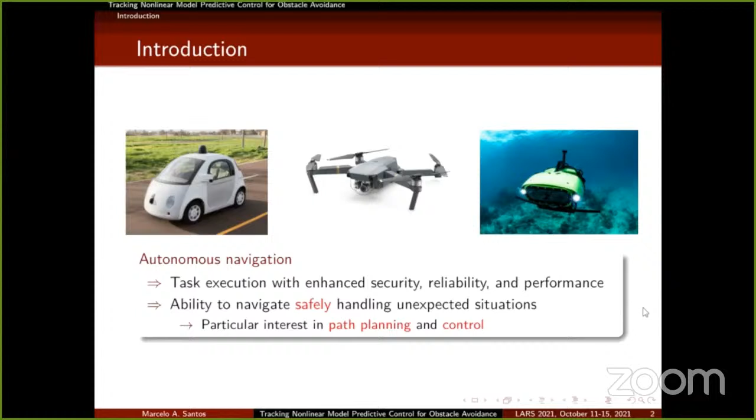In this work, we are particularly interested in the problems of path planning and control, mostly on how they can be performed together. We divide the solutions of path planning and control into two groups. The multi-layer approach is well established and with good results in real commercial applications, however under some conditions it might present performance deterioration and suboptimal responses. The single-layer approach, on the other hand, has an arduous design process due to its complexity. It requires a compromise between planning and control, since it is a multi-objective problem. However, it may have the benefits of avoiding suboptimality.

Optimal control is an interesting idea to work with in the coupled scheme because it allows gathering distinct objectives together and handling constraints explicitly. Particularly, we are interested in model predictive control, a finite horizon optimal controller, because it provides firm guarantees of stability and convergence from the control algorithm standpoint. Besides, its prediction-based nature allows better tracking performance with smoother control signals.

One of the problems that we are mostly interested in this work is the loss of feasibility during navigation. We can see two main sources of feasibility issues: the system dynamics limitations to perform a given task, and the limits and obstructions in the workspace.

In the literature, single-layer optimal controllers for avoidance are designed considering obstacles either as hard constraints or soft constraints. When considering them as hard constraints, feasibility issues could occur due to a large number of unknown pop-up obstacles, since the search space of the optimization problem might become excessively small. On the other hand, considering soft constraints, the idea followed in this work, feasibility problems might occur due to changing targets, common in this type of application, and due to significant deviation required to avoid an obstacle, because this might drive the system outside the controller's domain of attraction.

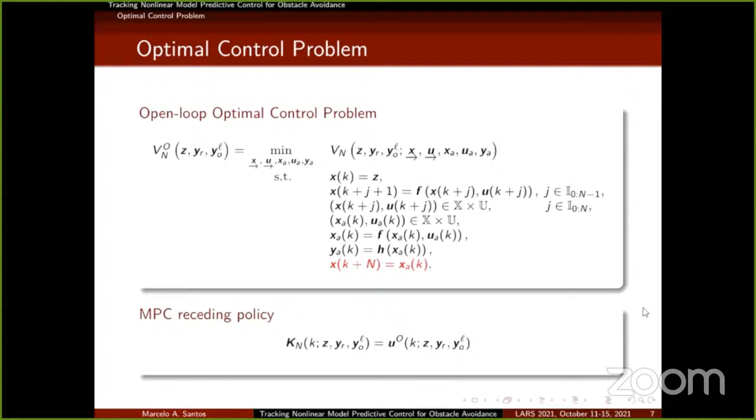The value function for the problem is composed by a stabilizing stage cost, standard in MPC, an offset cost function to make the artificial output converge to the desired output, and an avoidance cost to drive the artificial output away from the obstacle. It is worth noticing that the system is controlled with respect to artificial variables and not the user's desired ones, bringing feasibility assurance to the problem and enlarging the domain of attraction.

Also, note that the number of obstacles is unknown and not limited. However, to simplify the notation, a summation over the number of obstacles is omitted here.

The assumption of the stabilizing cost is that it is a continuous, convex, and positive definite function that is zero at zero. The assumption of the offset cost is that it is a continuous, convex, and positive definite function that is zero at zero. Additionally, and most important, this function is strictly increasing with respect to the distance between the artificial output and the desired output.

Finally, the assumption on the avoidance cost is that it is continuous and not increasing with respect to the distance between the artificial output and the obstacle position for all the obstacles. Also, this function is superiorly bounded, and it goes to zero when the distance is greater than gamma.

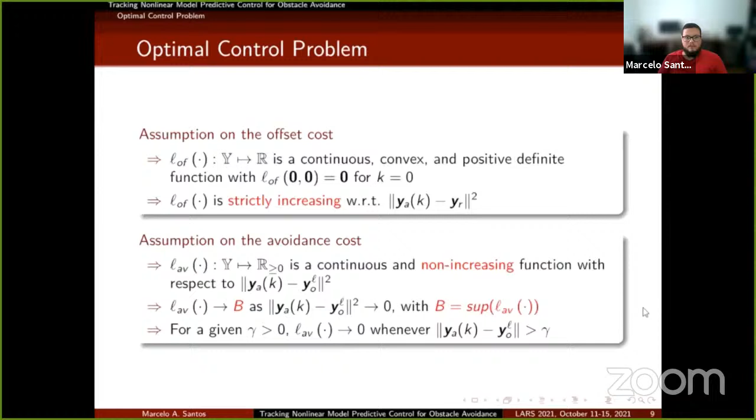These assumptions and the controller formulation allow any function respecting them to be considered. Now let's see some examples of how to set up this controller.

The stabilizing stage cost can be a quadratic cost penalizing the state error and the control effort, as common in MPC controllers. The offset cost function can also be a quadratic cost penalizing the artificial reference and the target. And the avoidance cost function can be some S-shaped functions such as sigmoids or hyperbolic tangent. For instance, here we are using a logistic function.

Some important remarks: the offset and the avoidance cost form an artificial potential field, but the avoidance cost must be bounded. The controlled system may suffer from local minima depending on how the offset and the avoidance costs are selected. If a local minimum appears, the controller will stabilize the system at the closest equilibrium point.

It is worth saying, however, that choices with global properties might be made, for instance, something like the harmonic fields.

The offset and the avoidance costs compete against each other, in a way that collision might occur since the avoidance cost is bounded and the offset cost is not. Thus, it is necessary to work with bounded workspaces, aiming to know the worst case of the offset error to properly choose the avoidance parameters.

Finally, large horizons in slow dynamic systems should be avoided because it might make the artificial reference jump a whole obstacle. If this happens, collision might occur.

So to analyze the proposed controller behavior, let's consider a quadrotor vehicle with 6 degrees of freedom and 4 actuators actuated on lift forces. Thus, the generalized coordinates for the system are composed by the translational and rotational variables. And to model the system using the Euler-Lagrange formulation, three coordinate frames are defined: the inertial one, the body frame, and the center of mass frame.

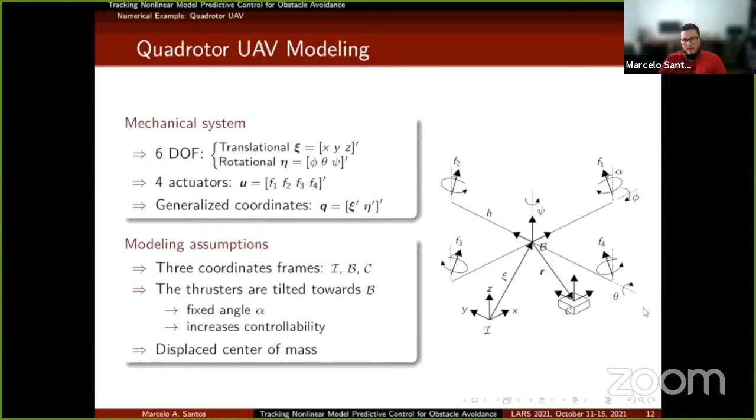Besides, the center of mass is displaced from the center of rotation. Thus, the coupling between translational and rotational dynamics is represented in the model. For control design purposes, the nonlinear model disregards the center of mass displacement. However, the system is simulated with the displacement.

Thus, in the simulation, modeling uncertainties are considered, aiming to be more realistic. The UAV workspace is limited and obstructed by nine obstacles. A 3D LiDAR-like sensor is emulated with a spherical range of detection of 3 meters. The sampling period is 10 milliseconds. The horizon is equal to 50.

Just to give an order of magnitude, Q is around 0.1, R is around 2, the offset gain is around 1,000, and the avoidance gain is around 50,000. The thrusters' lift forces are constrained by 12 newtons, and the states are also constrained. Finally, the simulations are performed using MATLAB and the CasADi toolbox with the IPOPT solver.

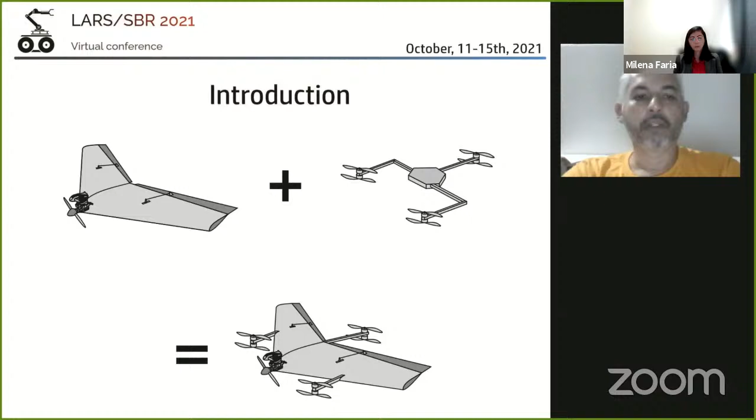For horizontal flight, we chose the flying-wing model, due to its ability to generate lift in almost its entire structure, and additionally to avoid recurrent impingement, which increases the drag coefficient.

The basic flight functions intended with this hybrid UAV concept are as follows. At first, at moment A, the hybrid UAV is landed with the combustion engine at idle speed. At instant B, the hybrid UAV activates the powertrain of the multirotor and takes off vertically. At time C, after reaching the necessary altitude, the hybrid UAV performs a transition to horizontal flight. At that moment, the multirotor powertrains are turned off and the thrust is generated by the combustion powertrain.

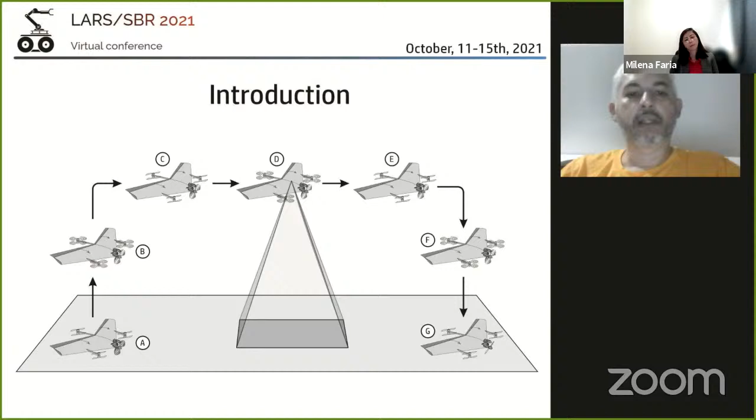During the mission, it is possible for the hybrid UAV to perform slow or hover flying, decelerating the combustion powertrain to idle and activating the multirotor electrical powertrains if necessary. Thus, as we can see at instant D, the hybrid UAV can be used to analyze some specific target. Then the UAV returns to horizontal flight in airplane mode at instant E. The UAV starts the vertical landing procedure at moment F, activating the multirotor powertrain and decelerating the combustion engine to idle speed, and the mission ends at moment G, when the hybrid UAV lands again on the ground.

The multi-rotor system uses coaxial motors with counter-rotating propellers. They enable up, down, clockwise and counterclockwise movements, forwards and backwards movements, as well as right and left movements.

One of the important points in this work was to coincide the center of gravity of the flying wing with the multirotor, reducing the need for corrections by the control board during multirotor flight.

The multirotor has a radius of 0.51 meters from the center of gravity. The flywing has a wingspan of 1.5 meters.

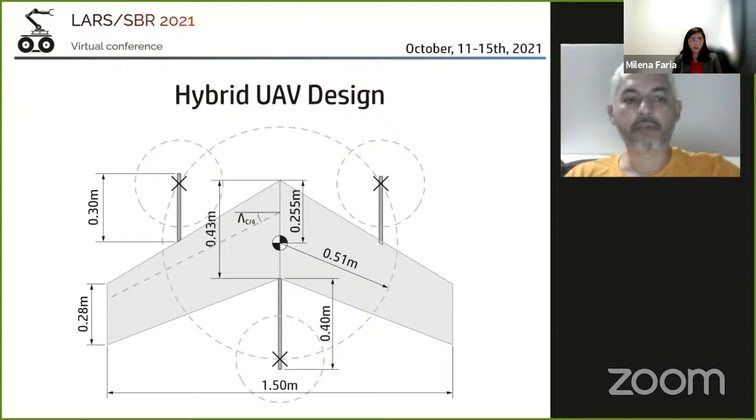With an area of 0.53 square meters, the positive deflection flywing concept requires higher speed than a conventional aircraft for the control surface to act efficiently, ensure control and good maneuverability.

To meet this requirement, three semi-symmetric profiles are analyzed: the ZAG-12, the MH-145, and CPQ-1.7. The choice and use of one of these profiles in the construction of the flywings is due to low moment coefficient values, since the aircraft will not have an empennage.

We analyzed the three profiles using the Profili 2.2a software, comparatively as a function of the angle of attack for the characteristic curves of lift coefficient and drag coefficient.

Considering that UAVs are not aerobatic aircraft, the flight must be performed with the longitudinal wings aligned with the horizon. We considered values between 5 degrees negative and 5 degrees positive for the analysis.

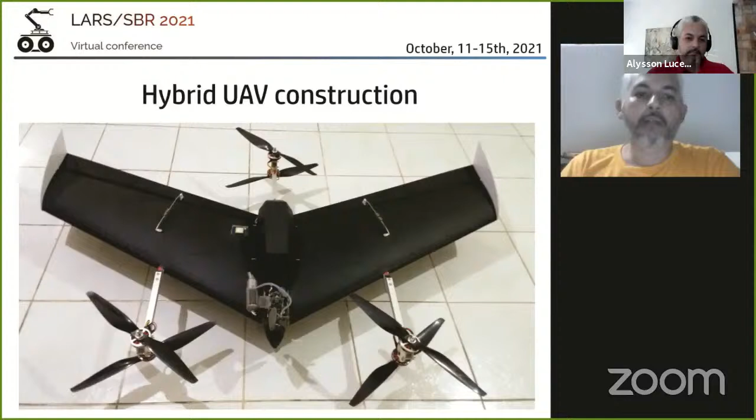We carried out outdoor tests using only the multi-rotor, with the combustion engine turned off. The second series of tests has been carried out only with the flying wing configuration, with the multi-rotor mode turned off.

Stabilization mode via the control board was always activated. The controls responded perfectly. Only basic maneuvers were performed.

We made the final test with head-on wind, including vertical takeoff and transition to horizontal flight. The combustion engine remains at idle until the aircraft reaches approximately 4 meters in altitude.

We started the acceleration of the combustion engine and deceleration of the electric motors. The hybrid UAV performed this transition perfectly, initiating horizontal flight supported by wing lift.

We introduced a new architectural design of the hybrid UAV with a simple configuration. Experiments and results show the versatility of the UAV operating in the field.

We performed several tests, including takeoff, horizontal flight, and transition tests successfully. Our final UAV has proven to be functional and the hybrid system effective.

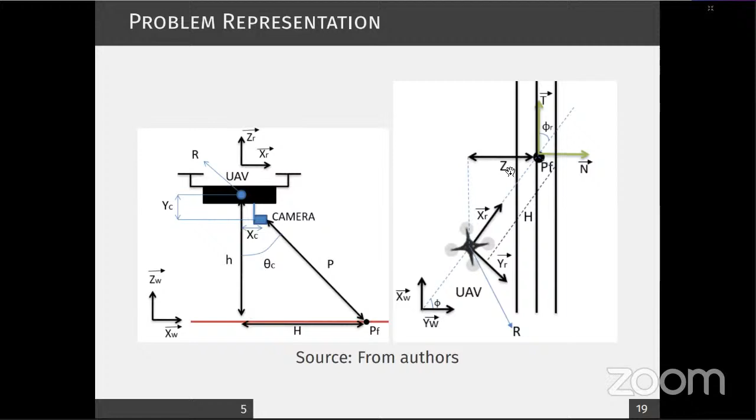Here is the aerial view of our problem, where we have, in this case, 3 power lines. The UAV has a lateral error relative to point PF, which is the variable z, and phi, which is the angular error between the vector xr and the vector t, tangent to the trajectory. These two variables must be minimized.

We apply a transformation of velocities from the world frame, which has 3 variables, to the robot frame, which has 4 velocities, using this matrix to transform between frames.

Next we apply a Serret-Frenet system, which is equation number 2, and then we can evaluate these two equations, Z and S.

Next we define the state errors of our system. These are the two variables stated above, Z and phi. Z is the lateral error, and phi is the angular error.

UOPT is the control action sent to the UAV, where r is UOPT multiplied by cosine of theta. We then apply R to the UAV to minimize the state errors.

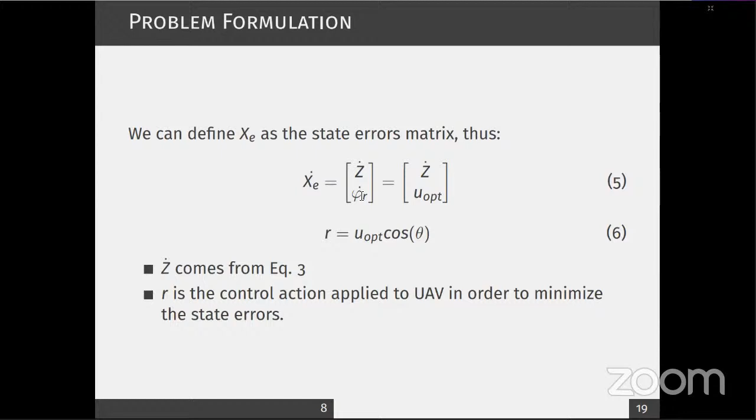Next, the methodology of our paper. First we have a raw image from a camera, then apply a grayscale transformation and Gaussian blur to reduce noise. Then we apply a Sobel operator to minimize horizontal lines and enhance the vertical lines that must be detected, and a Canny edge detector to enhance the straight lines.

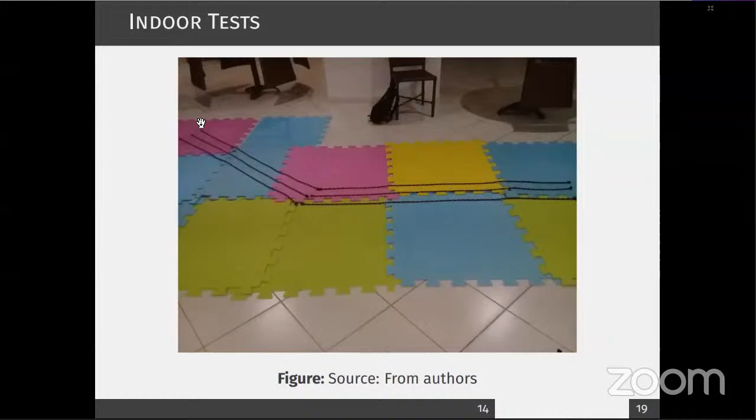For this indoor test, 4 setups were performed, each tested 25 times. For setup number 1 and 3, the UAV starts above the strings with a forward velocity of 0.1 meters per second. For setup number 2 and 4, the UAV starts 20 centimeters from the central string with the same velocities, 0.1 and 0.2 meters per second.

We applied some elementary constraints for the states: 15 centimeters for Z and 0.3 radians for phi r, and the UOPT was constrained as well, at 0.35.

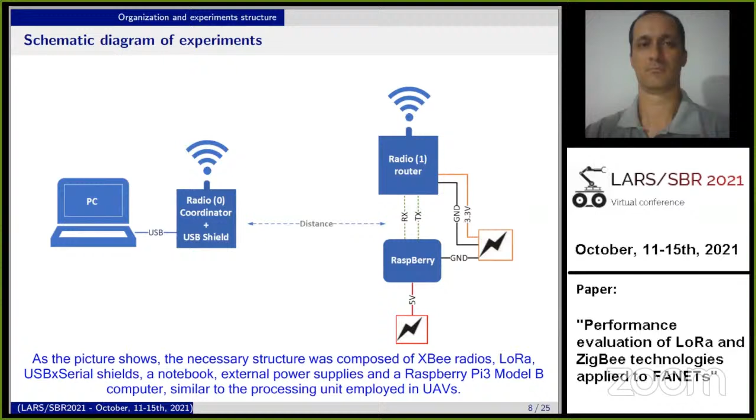As the picture shows, the necessary structure was composed of XBee radios, LoRa and USB serial shields, a notebook, external power supplies, and a Raspberry Pi 3 Model B computer, similar to the processing unit employed in the UAV. The tests were performed at baud rates of 9,600 bps, 38,400 bps, and 57,600 bps.

The investigation took place at different transmission rates and power and spreading factors, defined during the sending of 50 packets of 232 bytes each. Each scenario of sending 50 packets was repeated 5 times with an interval of 8 seconds between each new sending. At the end, the standard deviation and the average in the scenarios were calculated.

It's noted that the XBee radio in hardware in the loop was more efficient at both powers, achieving a transfer rate approximately 4 times higher than LoRa.

In the hardware in the loop experiment, the XBee showed no transfer rate beyond 200 meters at power level 0, but at power level 3, the transfer rate up to 300 meters only decreases significantly compared to the previous distance.

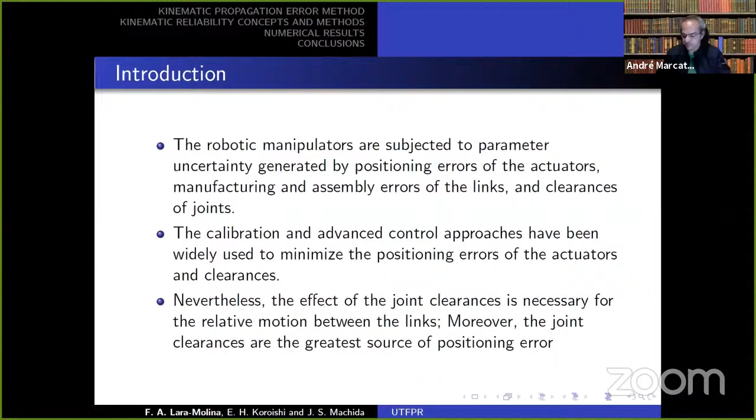Robotic manipulators are subject to uncertainty. The main source of uncertainty is the clearances of the joints. These clearances are necessary for the relative motion between the links, and calibration and control strategies have been used to minimize the effect of these errors. Therefore, it is necessary to develop methods that quantify the effect of these errors.

The present contribution presents a comparative study of several methods to assess the kinematic reliability of manipulators by using probabilistic theory and the fuzzy approach. Our methodology: first, we present a method to compute the total error in the end effector produced by the joint clearances.

Then the uncertain parameters of the clearances are modeled as random variables and also as fuzzy variables. Then four methods are used to evaluate the reliability. First, we have three methods based on the probabilistic approach: Monte Carlo simulation, the first order reliability method (FORM), the second order reliability method (SORM), and the fuzzy method.

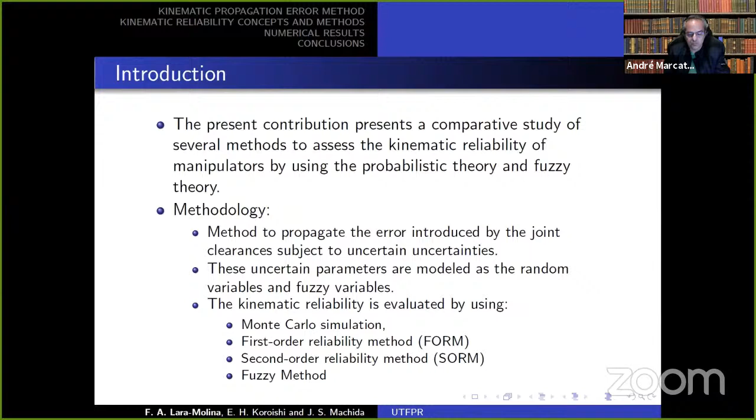The methods will be evaluated in this manipulator, which is a 3 degrees of freedom manipulator with 3 revolute joints. The DH parameters are present in this table, and in this figure is the model of the joint.

clearances. Each clearance introduces 2 additional degrees of freedom, one displacement in the x-axis and another in the y-axis, and the 3 joint clearances introduce 6 different degrees of freedom in the manipulator, set in this vector, the vector lambda.

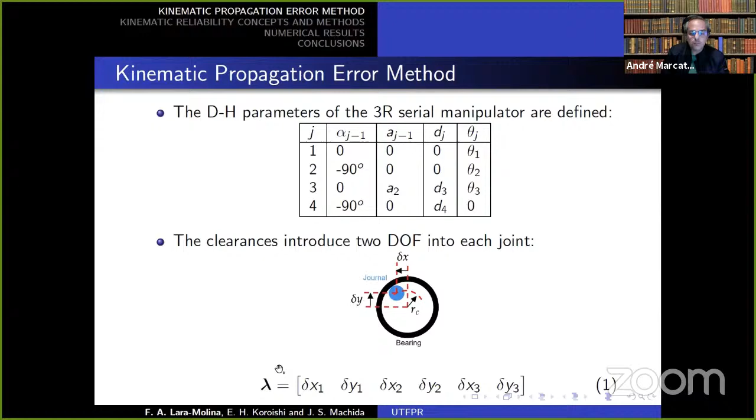First, the method to propagate the error of the clearances. I'm mapping the joint clearances into the total error of the end effector, as presented in this expression. This expression is based on the M matrix, which is based on the homogeneous transformation matrix that takes into account the homogeneous transformation between the frames of the manipulator, and the N matrix, which is a total orientation matrix, and delta E is the screw representation of the joint clearances.

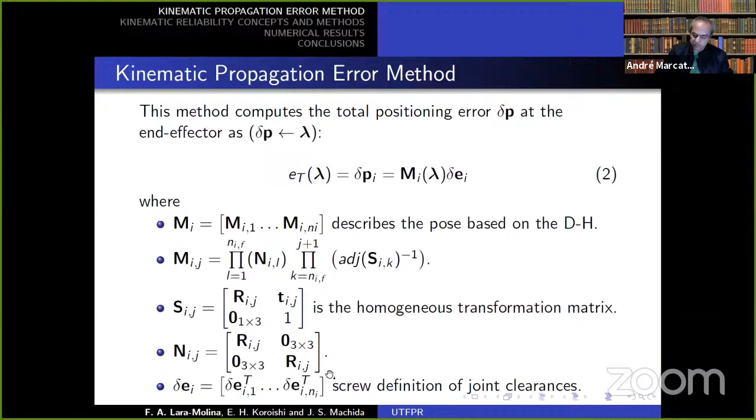The kinematic reliability expresses a measure of the position error exceeding the maximum error limit, as presented in equation 3. The operator Xi represents a measure of probability or a measure of possibility.

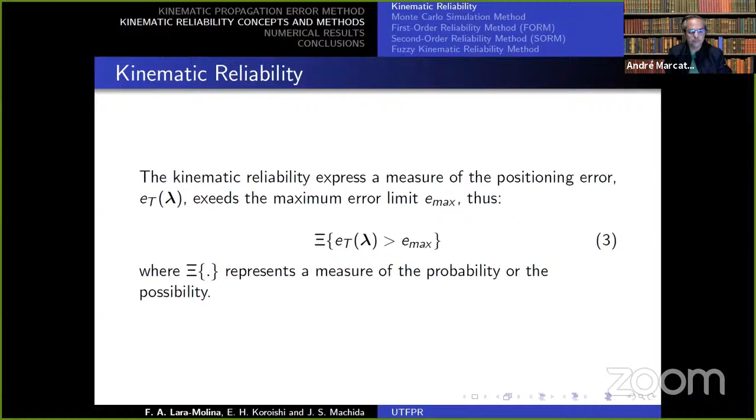The first method is the Monte Carlo simulation. This method has 3 stages. In the first stage, the uncertain parameters are sampled. Then the kinematic error is computed for each random input. Finally, the probability of failure is estimated as the rate of the failure samples and the total number of samples. In this way the probability of failure is estimated.

Then the last probability method is the second order reliability method. In this method the limit state function is considered as a nonlinear model. Therefore, the first nonlinear term of the Taylor series of the limit state function is considered, and the probability of failure is estimated by using the expression of equation 6.

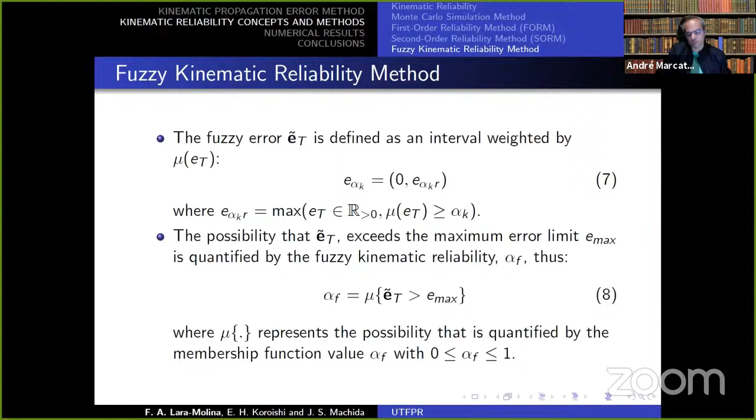Finally, the fuzzy method: the error is expressed as intervals weighted by the membership function, as equation 7 presents. Therefore, alpha f, which is the measure of the possibility of failure, is estimated by using the mu operator that represents the possibility of failure. This estimation demands the evaluation of the membership function, which is a value contained between 0 and 1.

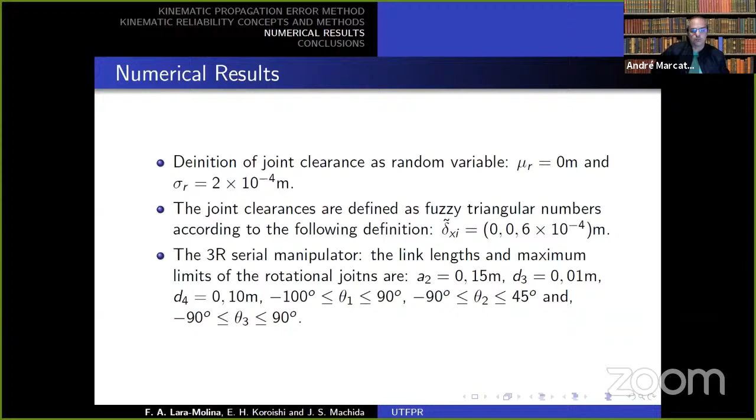In the numerical results, first we have the parameters that define the random variables, the uncertain parameters of the joints. Then the fuzzy variables that define the fuzzy parameters of the joint clearances, and also the geometrical parameters of the manipulator with the length limits and the maximum limits for each of the 3 joints.

Then we evaluate the workspace of the manipulator in the XZ plane and in the XY plane, and we are going to evaluate the kinematic reliability for 11 different positions as presented in these figures.

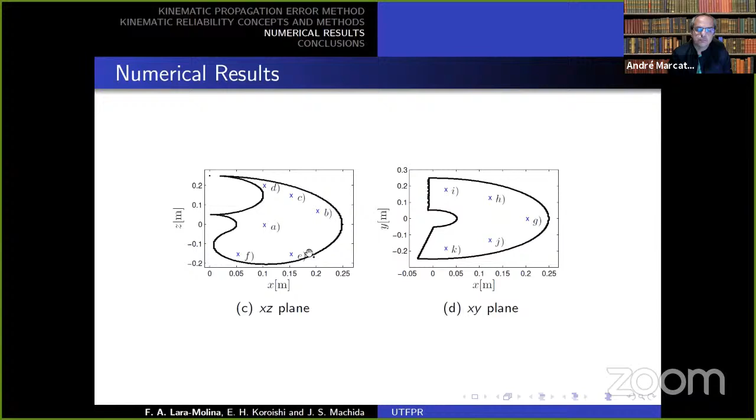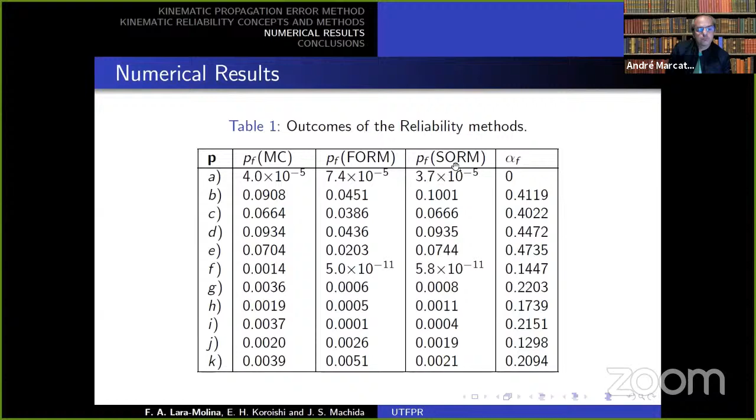In this table, we can observe the outputs obtained of the probability of failure by using Monte Carlo simulation, FORM, and SORM methods. We observe an agreement between these three methods. Nevertheless, in some positions there are some differences, and we can observe that the SORM method corrects the differences between FORM and the Monte Carlo simulation. The Monte Carlo simulation is our baseline to evaluate the probability of failure, and we observe good results for both methods.

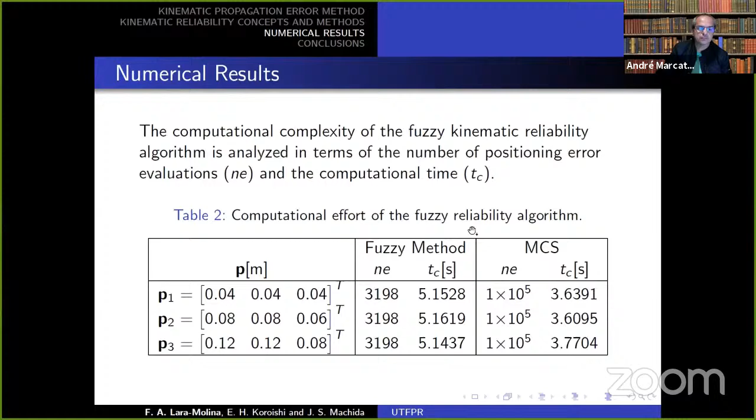Then we evaluate the computational complexity, and we observe an agreement between the two methods in the computational cost. As a conclusion, we observe that the methods using the probabilistic and fuzzy approaches have good results. The kinematic reliability is a criterion used to evaluate the kinematic performance of the manipulator, and as future work we will use these methods for the optimal design of the manipulator. Finally, acknowledgements to the sponsors, CNPq and CAPES, and thank you for your attention.

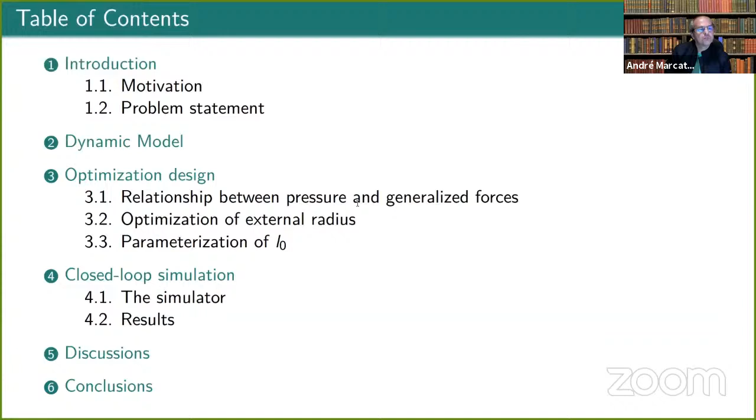This is the table of contents of the presentation, and now let me give you some motivation for our work. Rigid robotics continue to amaze us at record speed due to their incredible precision in tasks like positioning and grasping. However, their limits have also been exposed in applications where compliance and dexterity are needed. Also, due to their high stiffness and inertia, their designs are generally bulky and have high energy consumption.

In contrast, soft-body robots have erupted and changed conventional robotic research by mimicking nature, considering deformable, lightweight, and hyperelastic materials. However, many basic issues remain unresolved, arising from their principal property, which is continuum deformation, ranging from kinematics and dynamics to planning, control, and optimization. In this last area, due to the lack of complete models that clarify the intertwined components of soft robots, many optimization problems have been addressed through empirical methods, as it is difficult to correctly identify the optimization variable.

From here, we notice that the general problem is to obtain a design based on a model to fulfill a requirement. In this project, we address the internal pressure chamber design problem, which relates directly to the model-based design of the topology in actuator space. We also deal with a common problem in robotics, which is the design criteria for energy transfer. Therefore, our problem was how to design a soft robot to perform a task with less energy, given a desired configuration and a desired pressure vector.

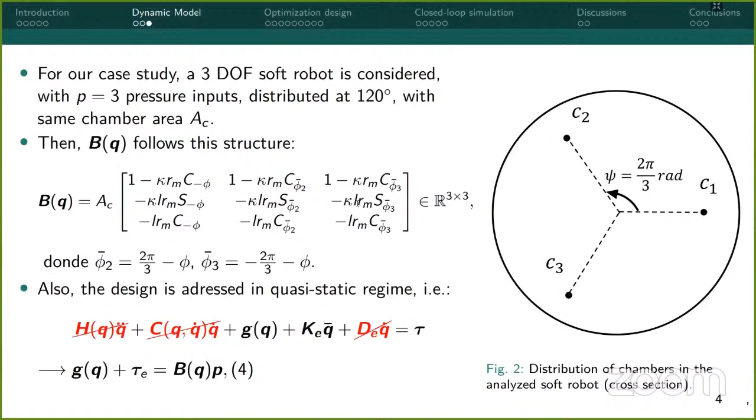Also, it's precise to point out that this design is held in quasi-static regime, so that the model reduces to the one seen in equation 4.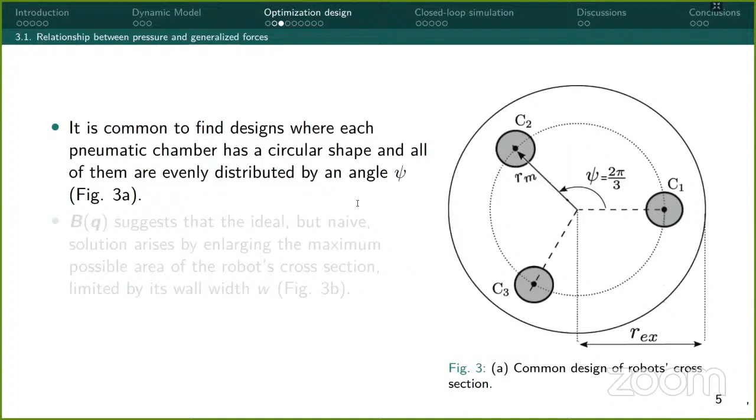However, this design is not the best one, because the input matrix suggests that the ideal but naive solution arises by enlarging the maximal possible area of the robot's cross-section, only restricted by the wall of the elastomer, as seen in Figure 3b. Here, both the area of the chamber and the radius that crosses the chamber centroid depend on the external radius, which makes the input matrix also dependent on the external radius.

As our design objective was to maximize pressure transference to generalized force, the input matrix is an excellent candidate for the optimization problem. We propose the square norm of tau as our preliminary cost function, which for a soft robot takes the form of the expression in equation 5.

From here, we notice that given a desired generalized force, the norm of the vector of pressure is minimized when B transpose times B is maximized.

But as this expression is not in closed form, we need to represent it by a scalar, which in our case was its maximum singular value, also called the spectral norm of B. So our preliminary expression is upper bounded as in equation 6.

If we plot the singular values of B as in Figure 4, we can see that the spectral norm corresponds to two singular values depending on the deformation coordinates. So, by taking the non-trivial root of the subtraction of singular value 1 and 3, we get our bound, which we call L tilde, seen in equation 7.

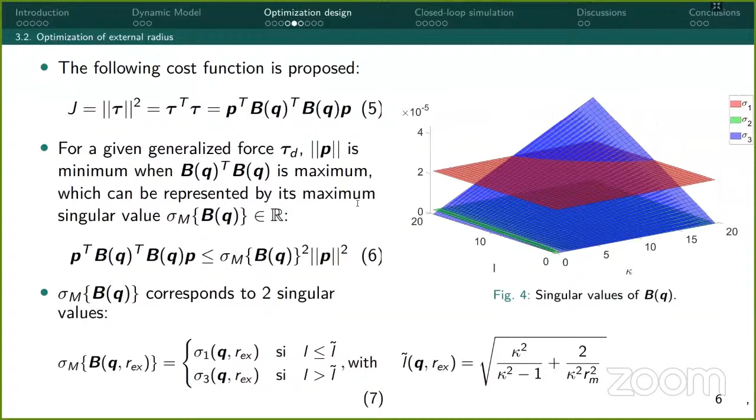We can now define our optimization problem as maximizing the spectral norm of the input matrix by maximizing the external radius, subject to the model in quasi-static regime and an upper restriction delimited by a maximum radius of the robot.

This problem was solved by the extended Lagrangian method, where we subtract from our cost function our active constraint multiplied by a Lagrange multiplier, as seen in equation 11. From here, we got our optimal external radius, which satisfies the Karush-Kuhn-Tucker conditions stated in equation 12.

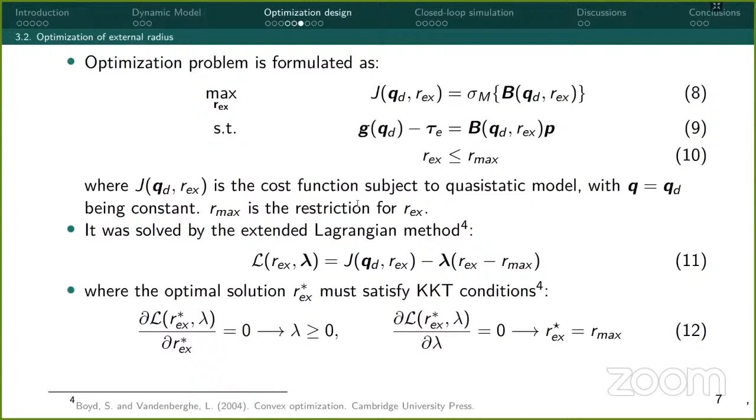Another geometric variable corresponding to the initial volume of the robot is the initial length, which, since it wasn't included in the input matrix, we needed to add into the model some other way. Here, our parameterization objective is to obtain an initial length such that for a desired configuration of the soft robot, we require at most a desired vector of pressure.

So for that, we modify the elastic forces of the model by approximating it with the elastic potential energy proposed by Godage, where it is represented by the sum of an energy of extension and an energy of bending. Also, by using the second Castigliano theorem and Hooke's law, our elastic potential energy corresponds to the one stated in equation 13, where A is the chamber area, I sub A is the area moment, and E is the Young modulus.

By obtaining the partial derivative of this elastic potential energy with respect to the deformation coordinate, we obtain an expression for the elastic forces as seen in equation 14. Then, we equate this expression to the one obtained in the quasi-static model, as seen in equation 15.

Notice that the first and third equations have our design variable, and as the gravity vector also depends on the initial length, we'll have a quartic equation giving us 4 theoretical solutions for the initial length, but only those with a positive lower bound of the desired length are physically viable.

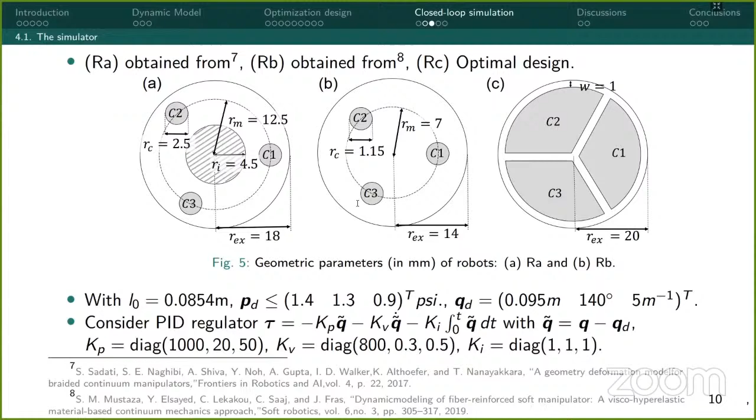All 3 closed-loop simulations were under PID control, having the following diagonal matrices for their constants.

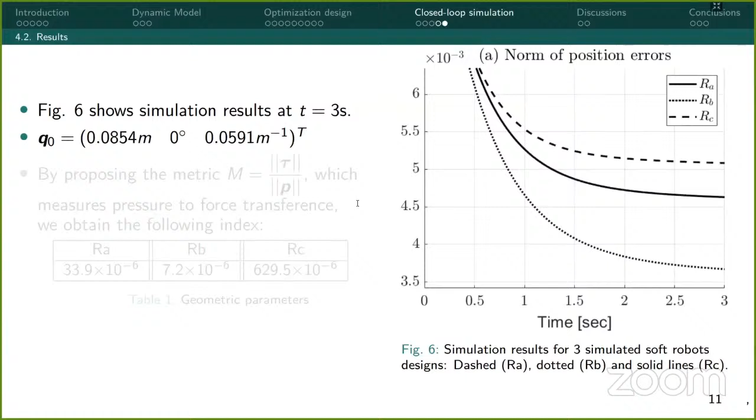In figure 6a, we have the resulting graph for the norm of the position error of the three cases, which shows an error around the -3 order, and the same occurs for the velocity errors.

This metric is the norm of tau divided by the norm of p, which, as seen in table 1, shows our optimal robot generates the best transference index.

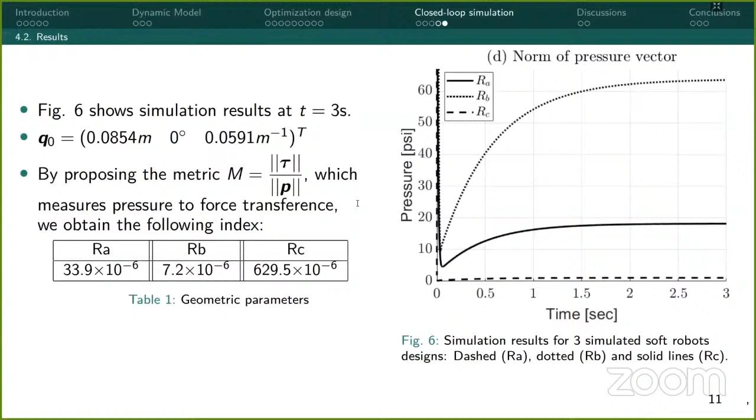For discussion, as seen in results, this model-based design of the cross-sectional area represents an important step in pressure-to-force transference maximization. However, previous works have shown through finite element analysis that the ideal morphology addresses a physical phenomenon called the ballooning effect, which represents a radial deformation due to the pressure force field exerted on the elastomer walls.

This phenomenon is not contemplated in the model, as one of the assumptions is that there doesn't exist any radial or circumferential deformation, so it must be addressed to prevent it.

This result is limited to establishing the design parameters of a soft robot given a desired configuration and an available pressure vector. However, to increase the robot's versatility, our methodology should be extended to consider a desired workspace instead of a desired configuration.

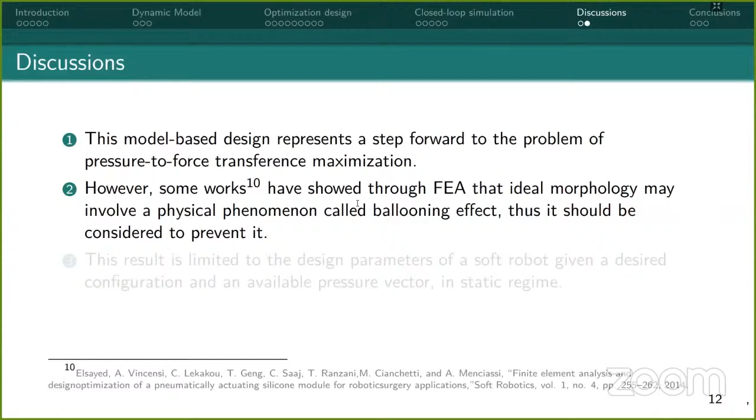In conclusion, the optimal design of a pneumatic soft robot is addressed in quasi-static regime to deal with the essential problem of energy efficiency: how to solve a problem using less energy.

As a case study, we address the method synthesis for a 3 degrees of freedom pneumatic soft robot based on a novel continuum Lagrangian dynamic model, illustrating the advantages of the optimization procedure for an increase of up to 86-fold of the pressure vector to force transference.

The next step is showing the feasibility in practice to study how important are the uncertainties in material characterization, viscoelasticity, state sensing, manufacturing, and power electronics. This may suggest further considerations on what parameters to consider in the optimization, then starting tracking standards of regulation, and finally the involved dynamic regime.

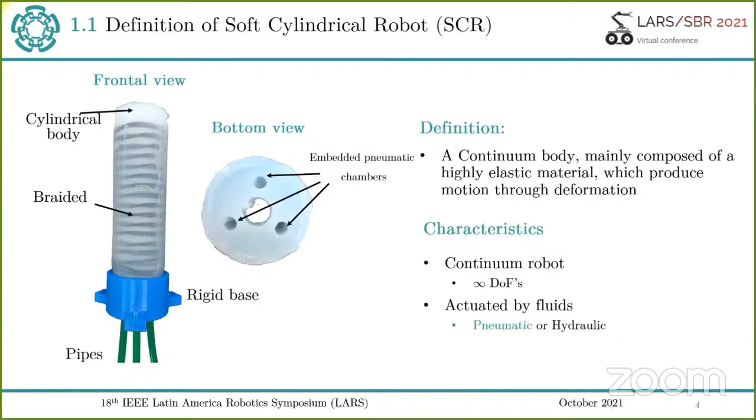I will start with the introduction. I want to define the soft cylindrical robot, which is a continuum body composed of highly elastic materials that produce motion through deformation. It is considered a continuum robot, implying infinite degrees of freedom, and it is actuated by fluids, in this case pneumatic energy fields.

The modeling approaches we found for the soft cylindrical robot are the finite element approach, beam theory approaches, and energy approaches. Approaches 1 and 2 are accurate, computationally expensive, and use a high number of degrees of freedom. Approach 3, compared to 1 and 2, is less accurate, computationally efficient, and uses a minimal set of degrees of freedom. In control design and stability analysis, qualitative models are preferred over quantitative ones, since control can deal with uncertainties. However, computational efficiency is important for these purposes. Therefore, approach 3 produces models useful for control purposes and stability analysis.

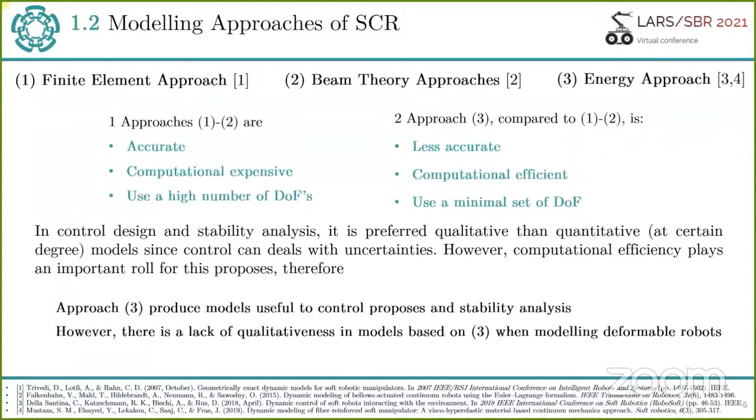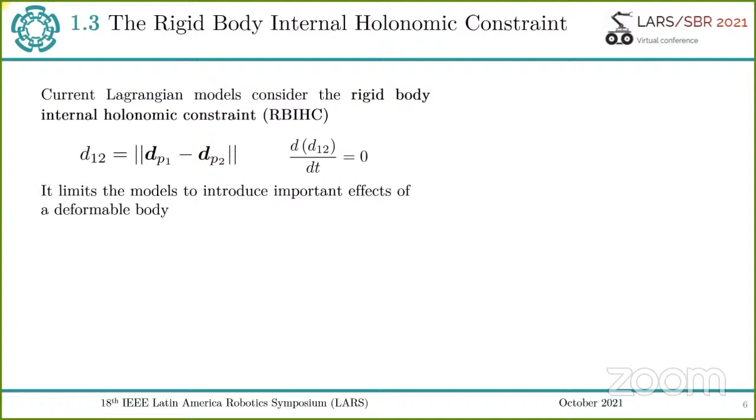However, there is a lack of qualitativeness in models based on approach 3 when modeling deformable robots, basically because these models consider the rigid body internal holonomic constraint. That implies that the distance between particles is constant. It limits important effects of deformation, such as density variation, variable center of mass, variable inertia tensor, and viscoelastic forces. Such consideration impacts not only the qualitativeness but also the accuracy. Therefore, the problem is to obtain a Lagrangian model of a soft cylindrical robot preserving its deformation properties.

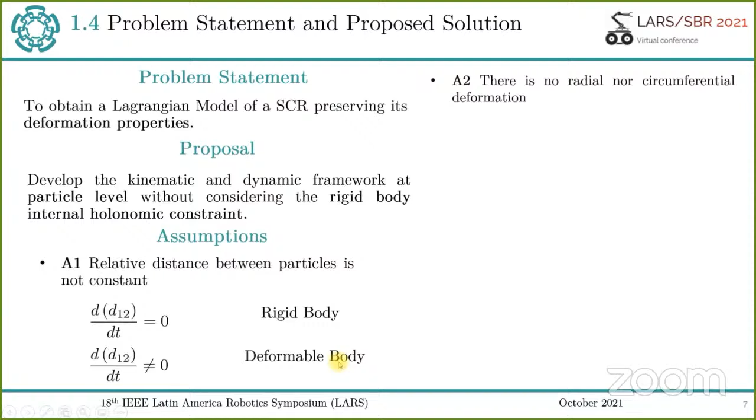Our proposal is to develop the kinematics and dynamics at particle level without considering the rigid body internal holonomic constraint. Our assumption is that the relative distance between particles is not constant, which is the case for deformable bodies. Also, we do not consider radial nor circumferential deformation, and axial deformation is constant for the entire column. If we assume the robot is composed of particle columns, the deformation between two particles will be the same for the entire column but different between columns. The backbone line is described by a unique circumferential arc segment, implying we are working under the hypothesis of constant curvature.

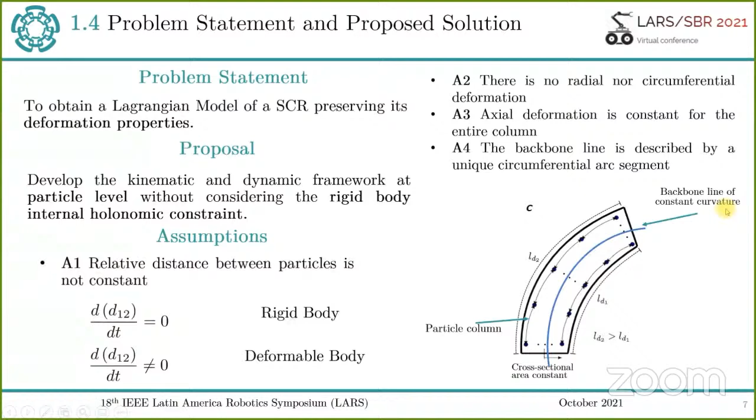In the modeling, we consider for the kinematics framework that the robot can be represented by a cylindrical body, and its deformation can be parameterized by deformation coordinates: the arc length, the azimuth angle, and the curvature, which is the inverse of the radius of curvature.

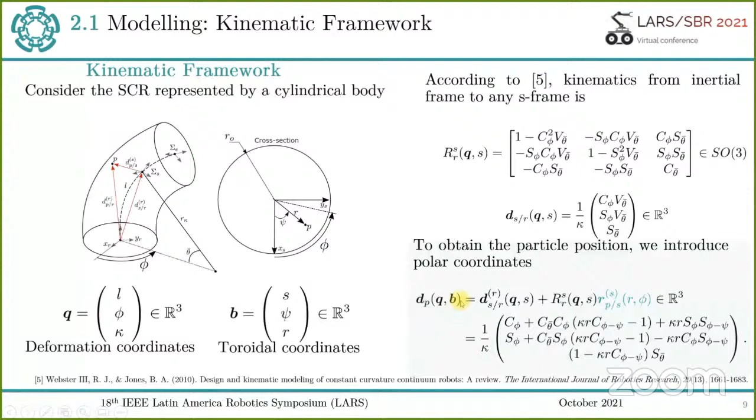According to this, kinematics from the inertial frame to any S-frame is given by this equation, and we propose to obtain the particle position with toroidal coordinates: the S variable, the psi angle, and the radius. This is the equation for the particle position.

In the dynamic framework, we use the D'Alembert-Lagrange formulation, where K is the kinetic energy, Q is the generalized forces, and QR are the generalized restriction forces. But for deformable bodies, where rigid body internal holonomic constraints are not considered, the projection of generalized restriction forces by the admissible motion is not equal to 0. It implies that these forces produce work and need to be considered in the Lagrangian formulation.

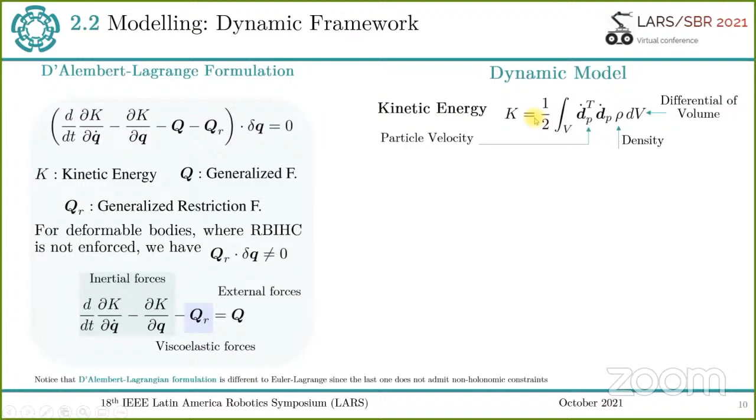Then the dynamic model is developed as follows. We define the kinetic energy as in this equation, involving the particle velocity, the density, and the differential of volume. We propose a density field which is not constant, but variable, depending on the deformation coordinates. We also compute kinetic energy using toroidal coordinates, and the particle velocity is obtained by the time derivative of the particle position equation. Then the kinetic energy results in this equation.

Now the inertial forces can be computed as follows. We have the inertia matrix. Also, we have the Coriolis matrix, obtained through the Christoffel symbols. For external forces, we have the generalized forces and the gravity vector, which involves a variable center of mass.

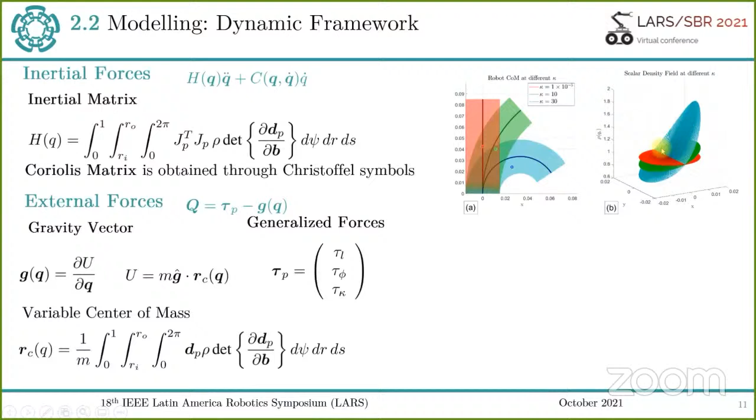Then we have the viscoelastic forces, and a possible form of viscoelastic forces is this simplified model, which involves linear elasticity and linear damping. Other nonlinear models are compatible with our formulation, as we show in a companion paper presented in this same conference.

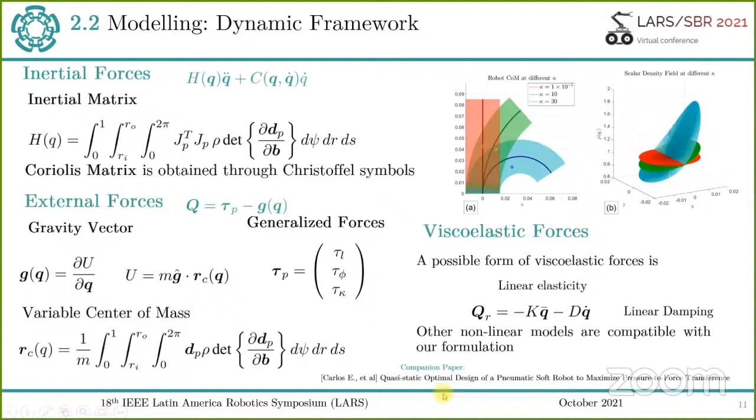Also, we have the pressure mapping that allows us to compute the generalized forces. It is computed by the gradient of the pressure potential energy, which involves the chamber's volume and the chamber's pressure. We can express these forces as an input matrix times a pressure vector, shown in this equation. The input matrix can be computed as follows.

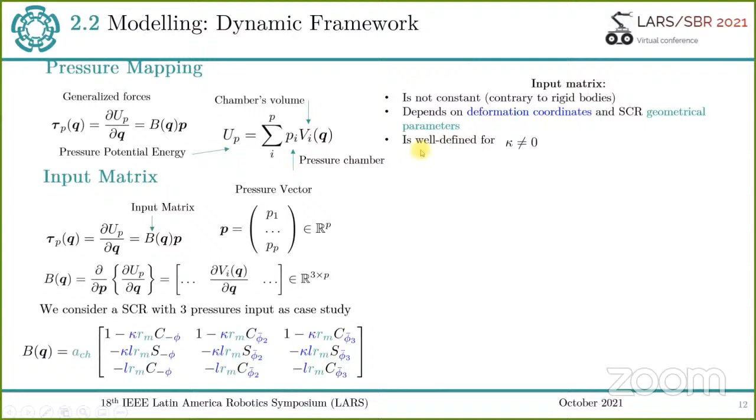We consider a subcylindrical robot with 3 pressure inputs as a case study, and the input matrix is not constant, which is contrary to what we see in rigid bodies. This matrix depends on the deformation coordinates and the subcylindrical robot's geometrical parameters, and it is well defined for any value of curvature different from 0.

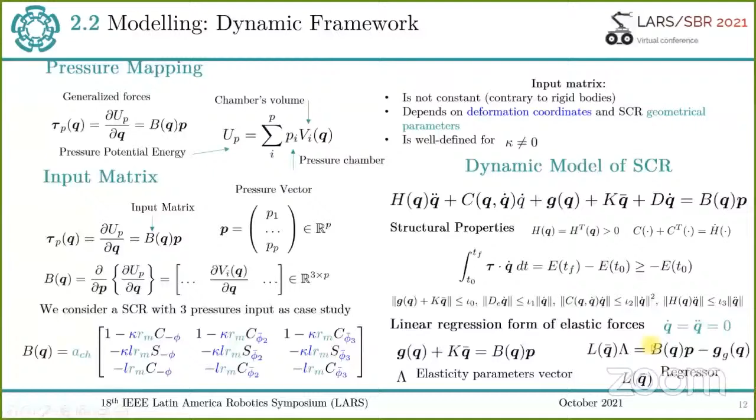Then our dynamic model of the subcylindrical robot is this one, and it preserves the structural properties found in Lagrangian systems. We can express this system in the static case in a regression form, where we have an elasticity parameters vector and a regressor.

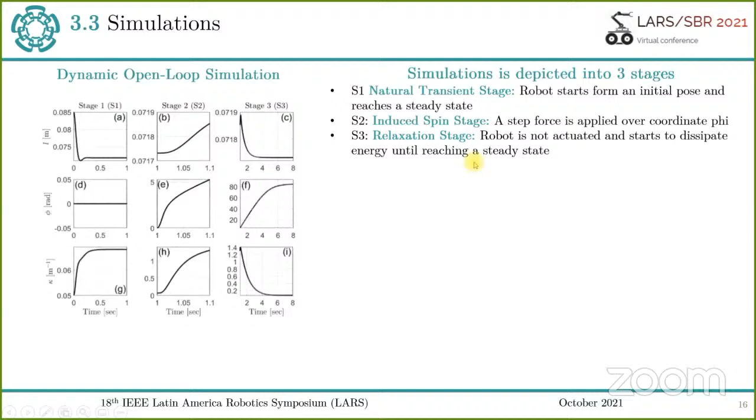We also work with simulation in open loop, and this simulation is depicted in 3 stages. First, the natural transient stage, where the robot starts from an initial pose and reaches a steady state. Then we induce a spin, the second stage, where a step force is applied over the coordinate phi, and finally, in the relaxation stage, this force is removed and the robot dissipates energy until it reaches another steady state.

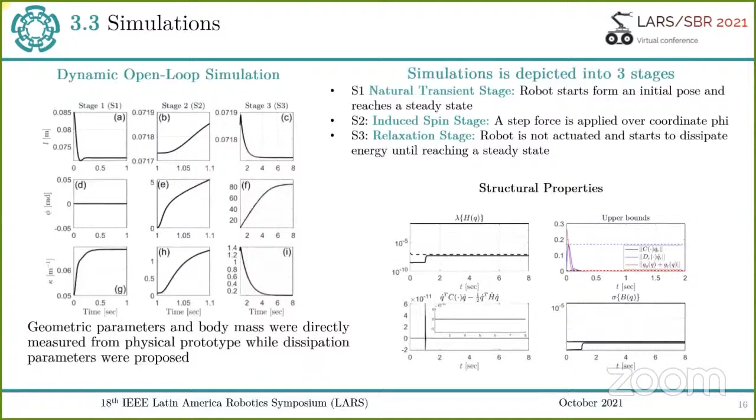Then, discussion on the model. Despite our proposed model introducing deformation properties such as density variation and variable lumped parameters referring to center of mass and inertia tensor, it does not consider radial and circumferential deformation, which significantly impacts the qualitative behavior of the robot and model accuracy. On the deformation coordinates, the model exhibits a singularity for null curvature.

However, such parameters facilitate the integration with toroidal coordinates and allow inclusion of the density variation.

On the constant curvature approach, we prove that it provides good results, but for free motion. It's probable that for restricted motion, or the inclusion of load and contact forces, the phenomenon of variable curvature will increase significantly, and the constant curvature approach will no longer be valid.

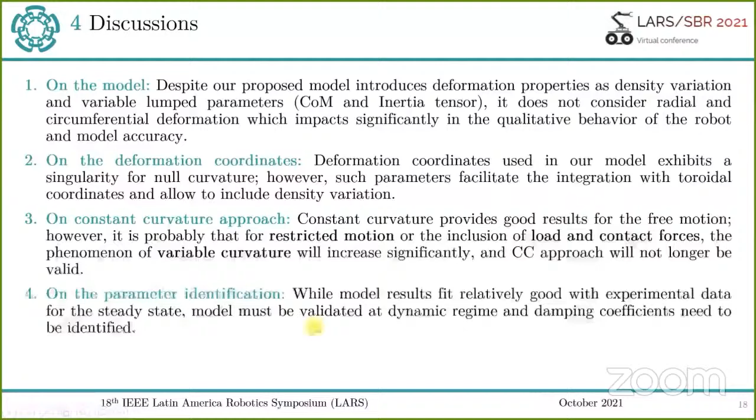On the parameter identification, model results fit relatively well with experimental data for the steady state, but the model must be validated at dynamic regime, and damping coefficients need to be identified.

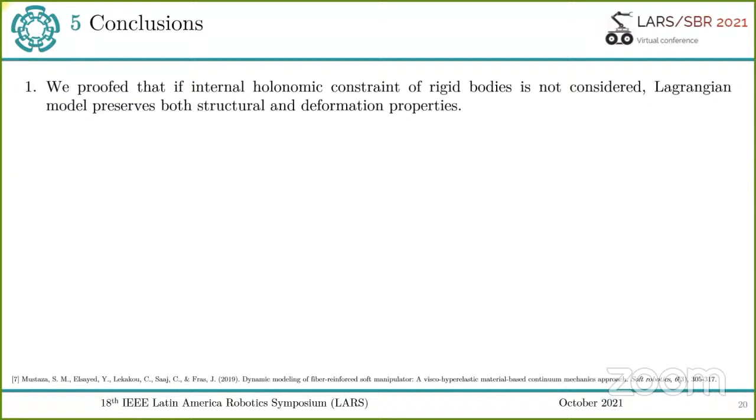At the end, we prove that if the internal holonomic constraint of the rigid body is not considered, the Lagrangian model preserves both structural properties and deformation properties. Also, while the inertia tensor is not shown in this work, it will impact a non-inertial formulation, which is our current work.

Viscoelastic forces are oversimplified in our model. However, given the Lagrangian structure, other complex models can be included. Our model can be applied to other robot geometries, but deformation parameterization is not a trivial problem.

And while our model is limited to the constant curvature approach, it can be extended to a piecewise constant curvature approach to approximate the variable curvature.

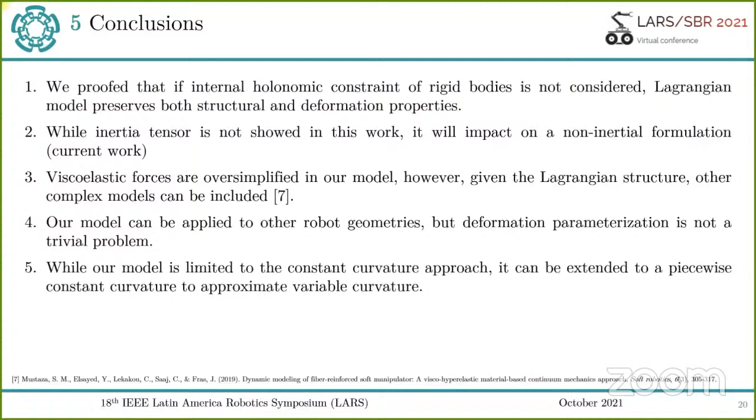And that's all for me. Thank you for your kind attention.

Thank you for your presentation, Christian. Congratulations on your work. Have we questions from the audience? No? I have only one question, Christian.

Okay. You showed some results using the open loop strategies. Yes. Do you also use a closed loop strategy? If you put a reference and test if your system goes to this reference, is it possible? Why do you use only open loop strategies? Why? Oh, okay.

It's because we are working first with the modeling of the robot, but it is intended to apply in closed loop simulation. At this step, we have only developed the modeling part, and we are just making a kind of validation of the model. So we are working just with the modeling only, not with the closed loop simulation.

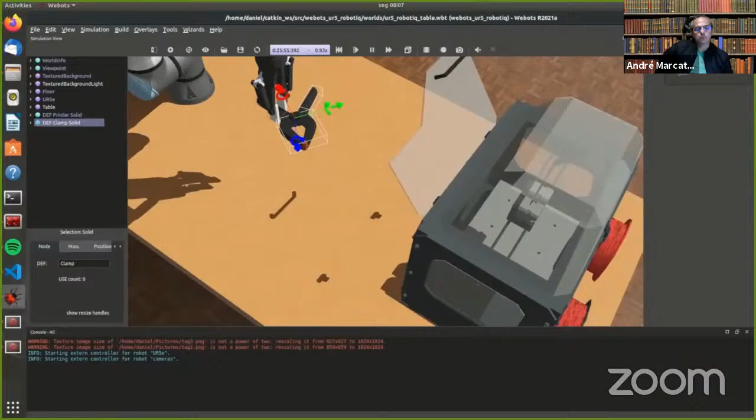Now for this experiment, the arm will grasp the bleach. We can see that first the arm will move to match the object orientation, and then move to its position to grasp.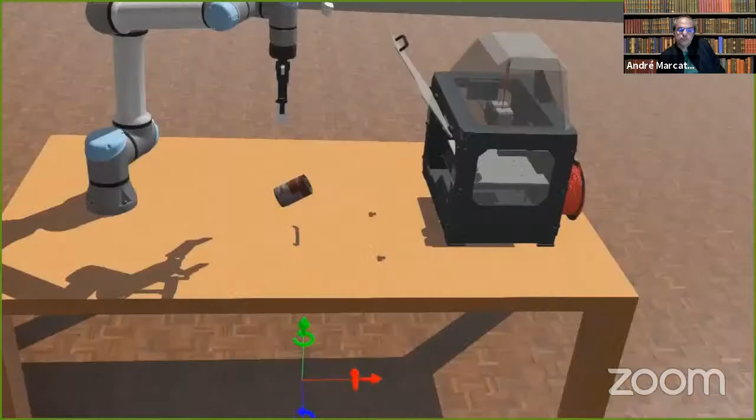For the final experiment, the arm will grasp this tomato soup can. Like the other case, it will first move to its orientation and then grasp it. Due to position estimation error, it won't grasp exactly by the center as it should.

To conclude the presentation, the conclusions. In the paper, we presented a 6D grasp system, where we proposed a grasping algorithm. The proposed grasping algorithm works independent of the neural network, which means it will work with any neural network that estimates pose.

We validated the system in a simulation environment, but still lack real-life tests. That will be done for future works. The references are on these slides.

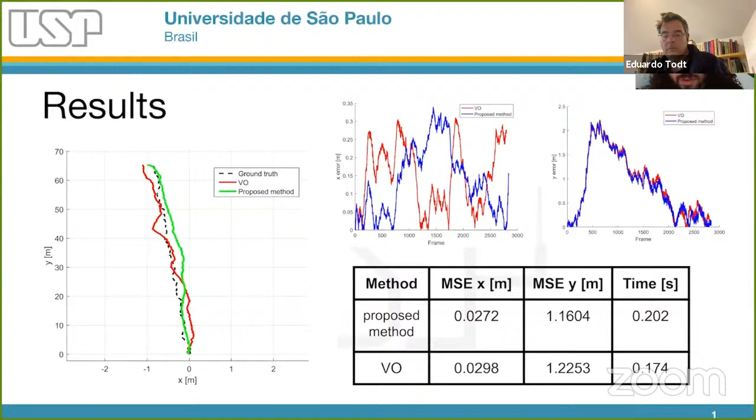In conclusion, the better performance of the proposed method occurred due to the better estimation of the rotation matrix used to calculate the pose of the robot's motion. This matrix did not present interference in its calculation, caused by the presence of points outside the curve, since it was not extracted directly from the computed essential matrix.

It's important to emphasize that some planes of the corridor can harm the trajectory estimation, so it has to be accounted for as interference that the algorithm suffers.

For future work, we will be applying the proposed method on the robot and doing field testing, and also fusing the proposed method with other types of sensors.

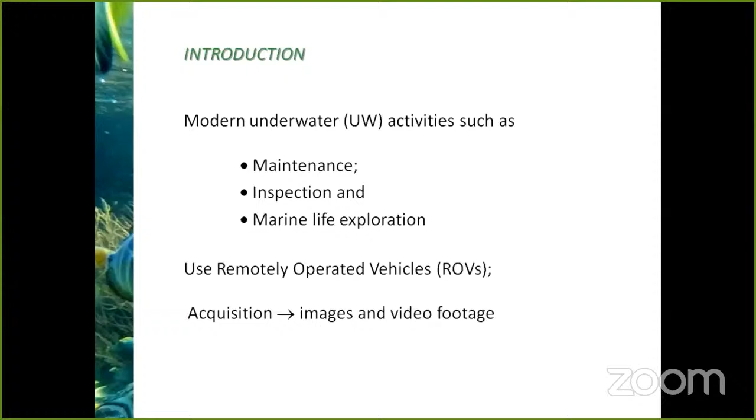The image quality depends on depth, particles in suspension in the water, and ambient light. The depth causes changes in color perception, and the turbidity causes blurring and contrast loss. The ambient light increases the turbidity perception in the image. Often, the acquired images have some distortion due to these factors, requiring improvement of the image quality.

In this work, we propose a deep learning single image architecture for underwater image enhancement. Our approach is based on unsupervised learning, and the method requires no paired datasets. The strategy uses the degradation present in the image as information for its removal and for the enhancement task.

In an autoencoder, the output image is a reconstructed version of the input image. In the training phase, the input and output images are matched in the loss function. The autoencoder learns to reconstruct an identical version of the input image.

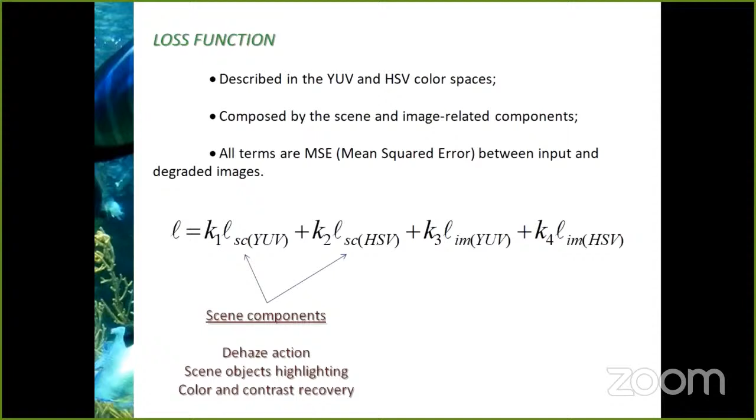The loss function is described in YUV and HSV color spaces in order to improve the color recovery and color preservation. It is composed of the scene and image components, and all terms are MSE between input and degraded images. The scene components are dedicated to the dehaze action, highlighting object, color and contrast recovery. The image components are dedicated to the context information, image reconstruction task, and color and contrast recovery as well.

Here we have some resulting images from the method. In the upper row we have the input images, in the mid row the degraded images generated by the degradation function. In the lower row the output images are shown. The output images present color and contrast improvement, and there is color cast and haze reduction. Only real images were used in the autoencoder training.

And here we have more results. In the same way, the output images present color cast reduction and improvement of the contrast and the color. Also, we performed a comparative study involving similar underwater image improvement methods. Our method presents good performance related to the other methodologies, with color preservation and contrast recovery.

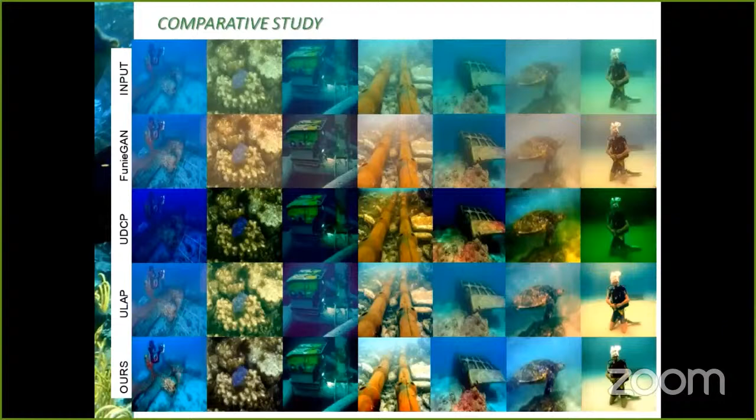Ending the presentation, I would like to highlight that the input image is the only information needed by the method, without any prior processing. An unsupervised learning methodology was presented that requires no paired datasets. In future works, we intend to extend the method to assist applications such as underwater monitoring and inspection. Thanks for watching.

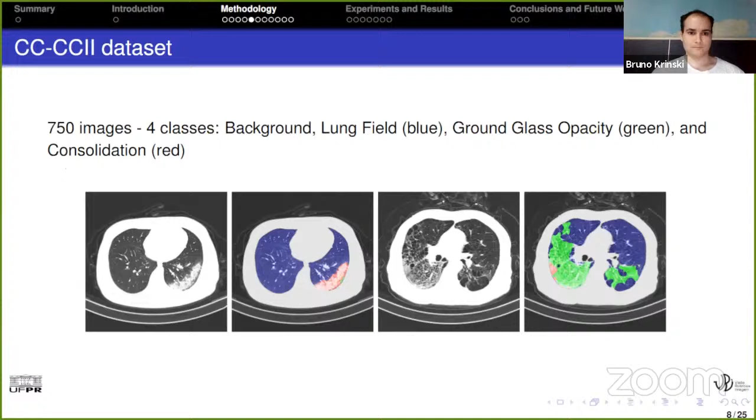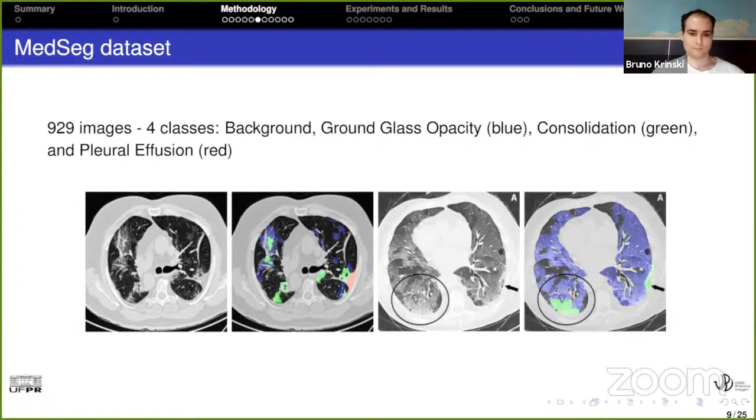We evaluated the segmentation models on 5 datasets: COVID China, MedSeg, MosMed, Ricord, and Zenodo. The first dataset is the smallest, with 750 images, containing 4 classes: background, lung field, ground glass opacity, and consolidation. The second dataset, MedSeg, is also small with just 929 images and 4 classes: background, ground glass opacity, consolidation, and pleural effusion. This dataset has some issues like coarse segmentation masks and trash markings like circles and arrows pointing to lesion regions; however, as the first dataset proposed, it is one of the most used in COVID-19 segmentation studies.

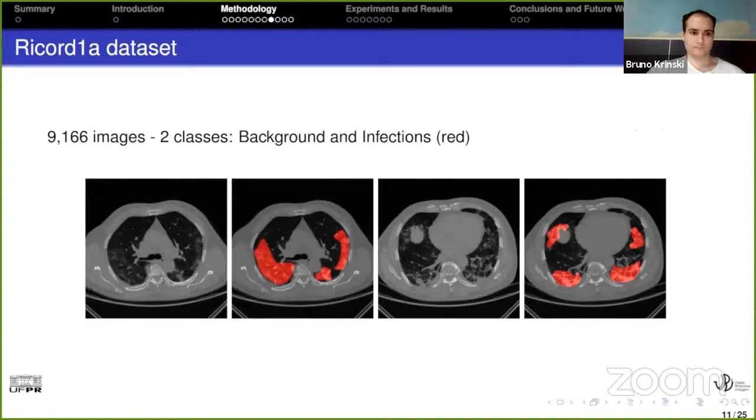The third dataset, MosMed, has 2049 images and 2 classes: background and ground glass opacity consolidation. This dataset is very imbalanced, with lesion regions representing less than 1% of the pixels. The fourth dataset, Ricord1a, is the largest with 9,166 images and 2 classes: background and infections. The last dataset, Zenodo, is an evolution of MedSeg, containing 3,520 images with 4 classes: background, left lung, right lung, and infections. This dataset does not present the problems of MedSeg.

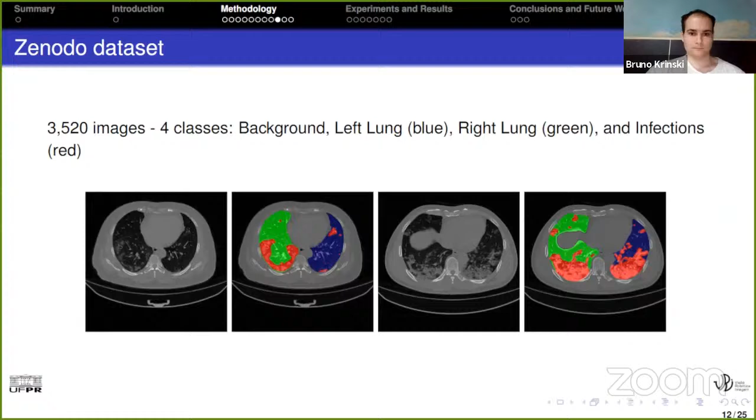To evaluate the models, we combined the 20 encoders with the 6 decoders, resulting in 120 models evaluated. We split the datasets into 80% for training and 20% for testing, using a 5-fold cross-validation strategy to train our models on each dataset, resulting in 3,000 experiments. We used transfer learning, with network weights initialized using ImageNet weights, and we didn't apply any data augmentation.

The images were resized to 256 by 256 to fit the network's input, and we trained the models for 50 epochs using a learning rate of 0.001, with the learning rate divided by 10 every 10 epochs. To evaluate the models, we used F-score and intersection over union metrics, using 1 minus the average of these two metrics as the loss to train the networks.

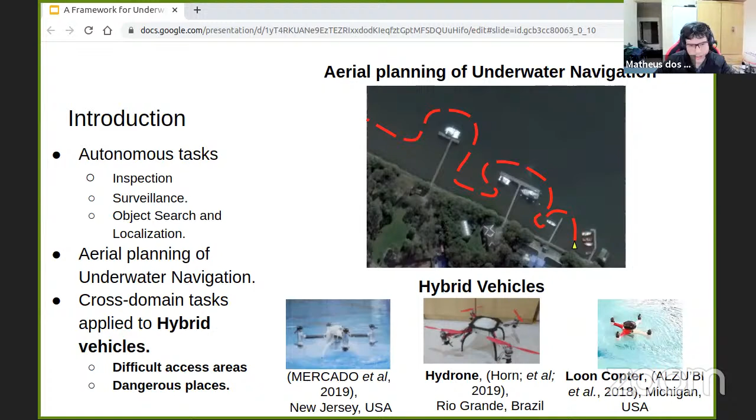This localization method can be applied in tasks such as inspection, surveillance, object search, and localization. It allows navigation guided by the aerial image: you can set a path on the aerial image, and the vehicle can follow this path on the water. We can also apply this method in hybrid vehicles, drones that can fly and dive at the same time.

This diagram represents our method. It has three processing nodes that come from the implementation in ROS. One node runs offline: first we do a semantic segmentation of the aerial image, and this image is loaded in the vehicle memory before the mission. We also have the localization node that implements a standard particle filter algorithm and estimates the vehicle position, and we have the matching node that implements the observation model of the particle filter. This matching node runs a neural network and also runs on a GPU.

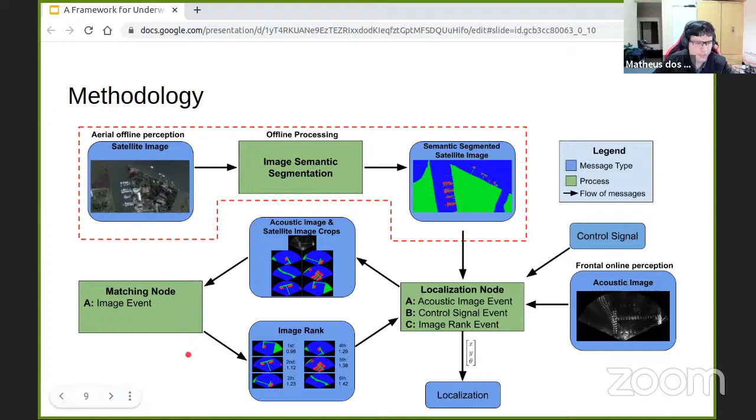For the aerial image segmentation, we segment the image into 3 classes: movable objects in red, stationary objects in green, and water in blue. The movable objects are not reliable for localization because they're moving all the time, so we want the stationary structures that remain in the same place, and we extract these in the semantic segmentation.

The localization node implements the standard particle filter. All the knowledge of the algorithm comes from the satellite image. This node behaves according to three events: one is the acoustic image event, when a new acoustic image is captured by the vehicle; the control signal of the motors of the vehicle; and also the image rank event, when an image comes from the matching node. This node estimates the localization of the vehicle, its XY position, and the vehicle heading.

First, the acoustic image event happens every time a new acoustic image arrives, and it crops the satellite image regarding the particles of the particle filter algorithm. We spread the particles in the map, that is the satellite image, and then crop this image regarding the field of view of the sonar. So we do a lot of crops, one for each particle, in the same format and shape as the acoustic image. Then we send this image to the matching node, which does the comparison and returns the similarity score between the acoustic image and the satellite images.

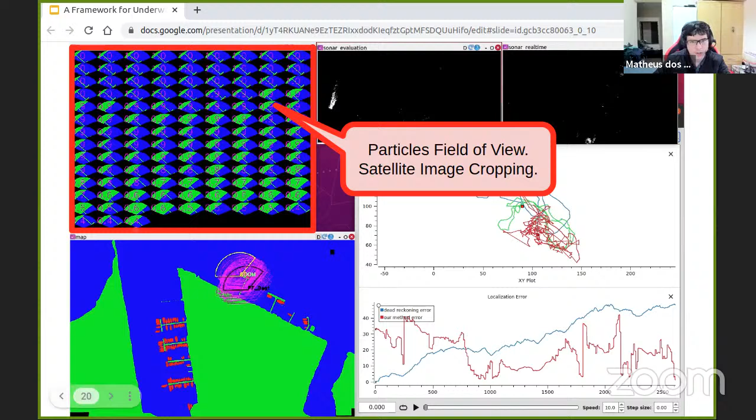So here we have some results. In this window, we have the field of view of each particle, and here the acoustic image that's being processed. We have a few plots showing the vehicle path and the error. The localization error of our method is represented in red, and the localization error of dead reckoning is represented in blue. We also have the map with the position of the particles shown as purple polygons. The yellow polygon is the ground truth position, the green polygon is the dead reckoning estimate, and the black polygon is the estimation of our method.

So I will quickly play the video here. At the beginning, we have a higher error because we started the algorithm with a really high standard deviation. But as soon as the vehicle gets close to the structures, like the pier, we relocalize the vehicle and can estimate a better localization than dead reckoning.

Okay, so this is the final result. We show that our method improved the vehicle localization using the aerial and acoustic images. We decrease the accumulated error of dead reckoning by relocalizing the vehicle over time when it's close to structures in the marine environment.